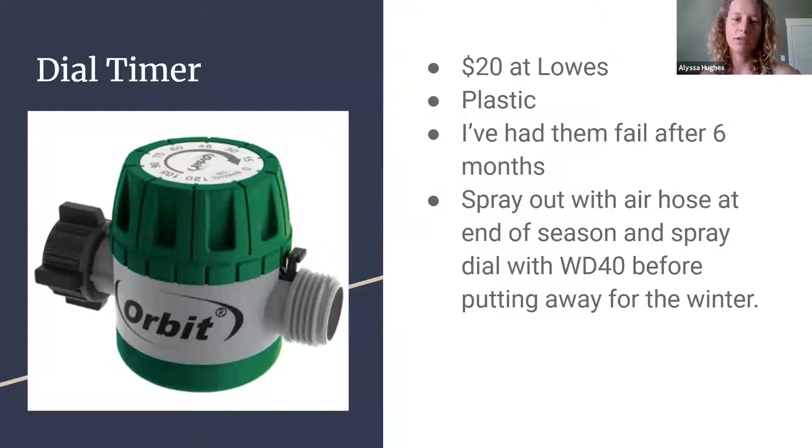So this is the dial timer I was talking about. You can see it's all plastic, so it's probably not going to hold up a super long time even if you take really good care of it. They're around $20 at Lowe's. I have had these fail within the matter of months, like 6 months in, I twist the timer on, come back an hour or two later, and it's still watering because it never shut off. This timer, as with other timers, they're great to put in place, but there's always a chance they can fail. If you do use this timer, you'll get it to last longer if at the end of the season you spray it out with an air hose and lubricate the dial with WD-40 before storing it.

Here is an electrical timer. It requires a couple AA batteries, and you can see it's just a single hose application. It's just as cheap as the dial timer, and it has really great reviews. The nice thing about this one is you can set the clock and the time, and then it'll just go off automatically, where with the dial timer, you have to remember to turn it on. You don't have to remember to shut this one off—it will automatically do it as long as the batteries continue to work.

And it's nice because it has a 12-hour repeat option, so when it's really hot and really dry, you can water at 6 a.m. and 6 p.m. I have a little video clip of that.

So this is the dial timer. It's really straightforward—you just twist it, and you can see it can go up to 120 minutes. Again, it's plastic. You connect it to the spigot on the left and to the hose on the right.

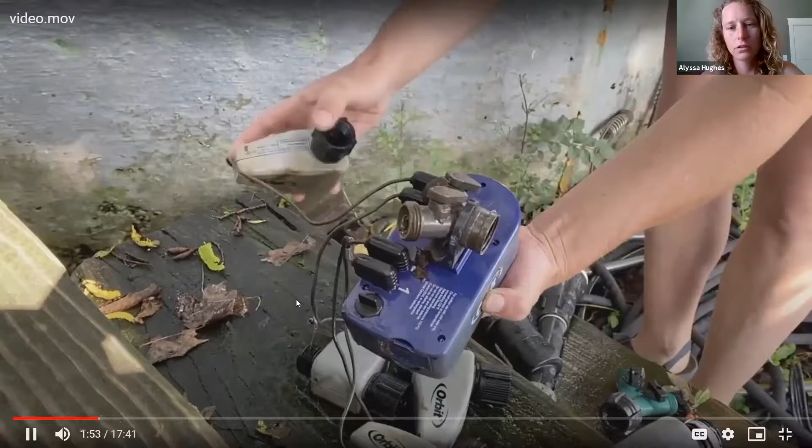And then this is a 4-unit timer. It's nice because these are not all attached, so you could even have 2 different spigots, if they were close to one another, all on the same timer. And that's the Orbit's brand.

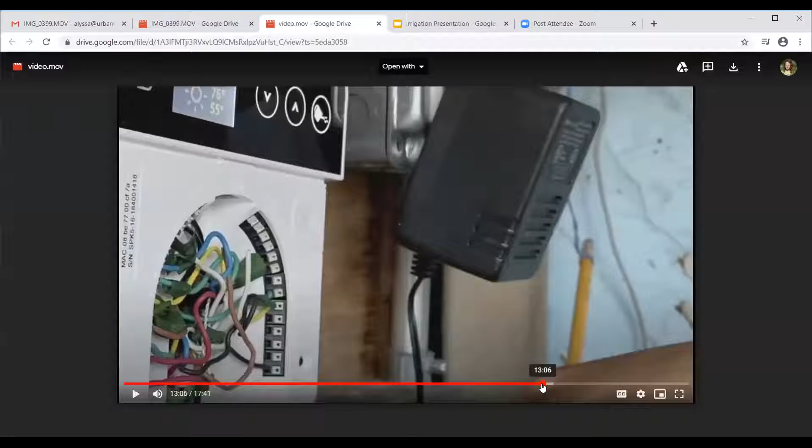Okay, so we have a question from Laura. The question is: is the rain machine PoE, or does it require a separate power source? It does require a separate power source, so that one you have to plug in to just a regular outlet.

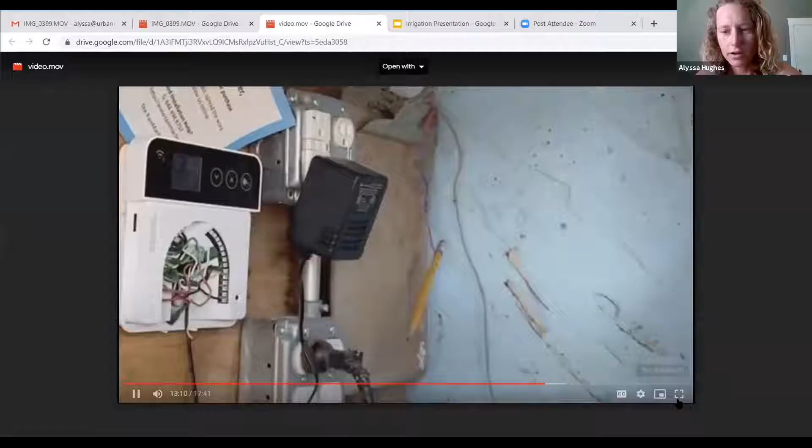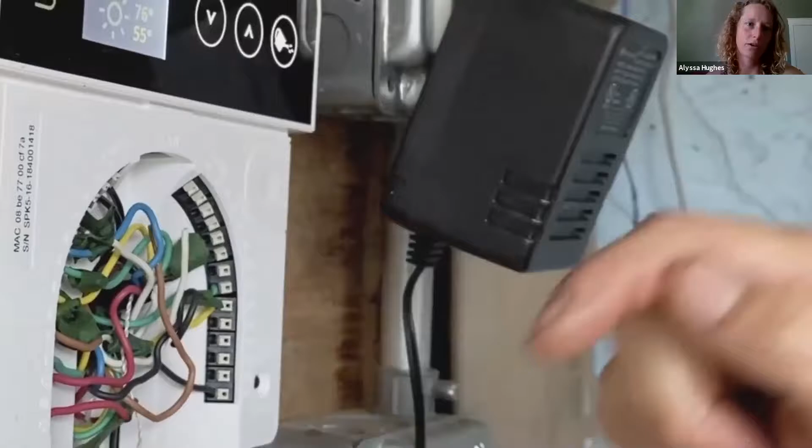So this is our rain machine, and you can see that it is actually wired in. This one's not connected to hoses. It's connected to your plumbed-in irrigation lines, wired in, with different diaphragm options that open and close once they're hooked to the system. It has a lot of different programs, so you can have different increments of plots running at different times.

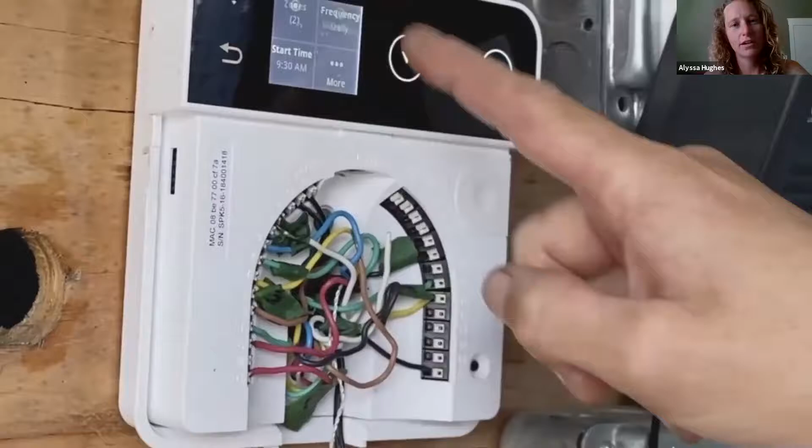It's nice because the start time you can connect to sunrise or sunset, so you can set it like 30 minutes after sunrise or 2 hours before sunset. The one thing that does annoy me about this one is that as far as frequency goes, it only allows you to water daily, not hourly.

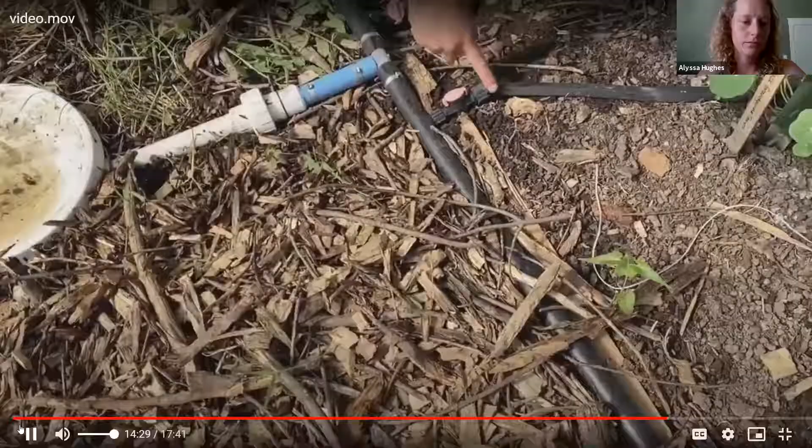So the different zones - we have 9 plots in our back field, and 3 of them are underneath plastic, 6 of them aren't. When I say underneath plastic, they have high tunnel or cat tunnel structures on them. The different programs allow us to hook up all the stations underneath a high tunnel and let those water together, while all the ones that aren't under plastic can be on a different program and run for different amounts of time.

That's really nice with this system because it is connected to the weather. The high tunnel plots, even if it rains, they're not getting watered, because the plastic isn't allowing the rain to soak into the beds. So it's nice that through that system we can go in, and for different programs, disconnect it from the weather app so that it waters even if it's raining outside.

So yeah, similar things, but things to consider before you buy a timer: are you going to need electricity? If this is on a rural plot where you're not at, you're going to want different options. I've seen people connect ones that do need electricity to little solar panel systems. So there are other options that don't need Wi-Fi or an Ethernet cable.

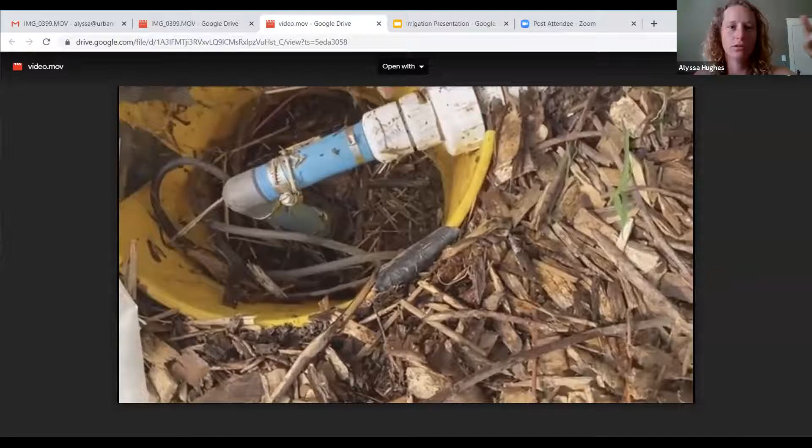It's always a good idea to check for spiders before you stick your hand down in there. It's hard to see from this image, but there's a little electrical component in there. When the electrical lever switches as the timer turns on, it twists a little dial that allows water to start seeping in, which expands the valve and allows water to flow freely. This system that we have here, I'll talk about that later.

Where did you learn how to do that? That is so cool.

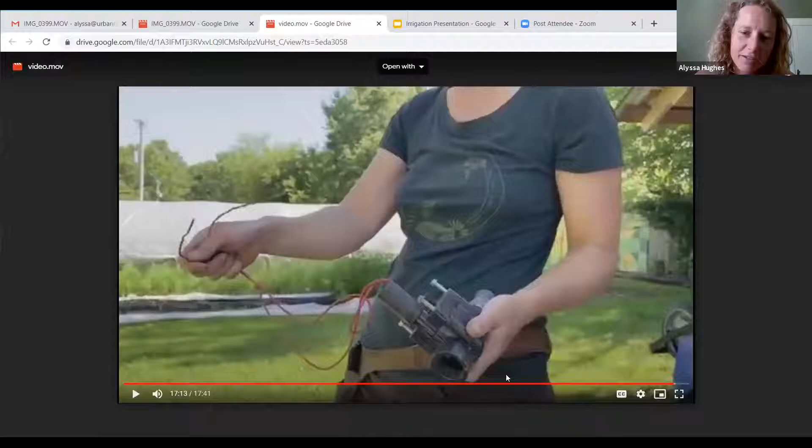Adam Millsap did most of it and has just kind of taught me how to use it. But there are some really great resources out there that you can learn from, and I'll tell you more about that a little later.

So this is what is down in the bucket that you couldn't see. The wiring actually is ran clear back from that timer underneath the ground to our individual plot buckets. And yeah, this is the little piece that expands to allow water in and then allows it to flow through.

Okay, so back to hoses. Before you install a timer on a hose bibb, it's a good idea to have a Y splitter put in directly to the spigot. That's just kind of a convenience thing. The timer's nice, but sometimes you just want to be able to quickly turn on and off a hose.

And then it's a good idea to have plumber's tape and hose washers handy. You'd be surprised how much a drippy faucet adds up over time. So if you can just prevent that in the beginning, that'll save you from having to come back, take it apart, and fix it later.

Quality quick release valves will make your life better. If you haven't used those in irrigation, you should go to Lowe's or Walmart and just even buy the cheaper brand. Especially with older people, if you have any sort of arthritis problems, attaching hoses to the spigot can be really difficult and annoying. But if you already have the quick release valve connected, then it's a really simple on-off thing.

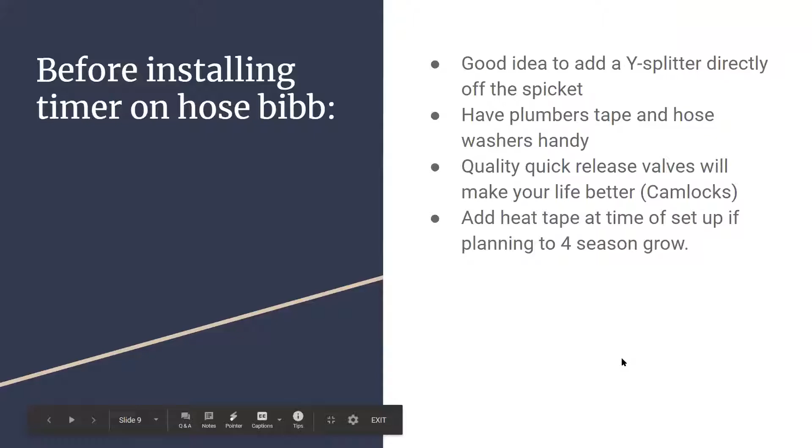That's a really good point. I have rheumatoid arthritis, and so just doing two hoses is really difficult. Yeah, it's really annoying. Once you use quick releases - I used to think this when I used air hose applications that are all on quick release - I'm like, why is this not just the norm?

It's so much easier. And another thing to consider, if you are going to be growing into what we call the fringe seasons, either early spring or late fall or through the winter, it's a good idea to go ahead and add the heat tape right away. It's just easier to put on at the beginning, and then you're not panicking the first frost night and having to take it all apart.

Okay, so these are the quick releases that I was talking about. A set of 4 from Walmart or Lowe's is around $20. I'm really hard on stuff, I guess, just because we're using things daily. But if I get an entire season out of these, I'm happy, which broken down is $5 a piece, and it definitely saves me $5 worth of time and frustration to have these on.

And before I attach these to a hose, I always use plumber's tape as well, just to prevent leaks. I've seen some of these that are nice - as soon as you disconnect, it actually stops the flow, which saves you another step and another piece of equipment.

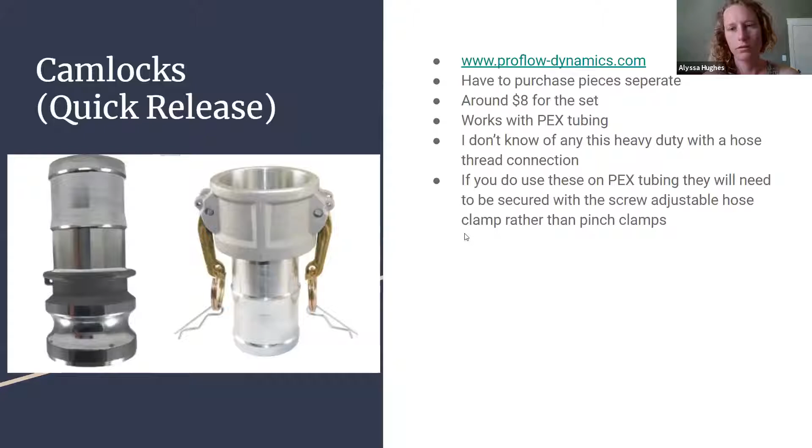So ball valves, this is what I was talking about with those quick releases that shut off automatically. If you don't have that kind, then this will also save you steps. I put these before any of our watering ones, just in case I want to switch them out. I usually use these in combination with the quick release. That little black plastic lever piece wears out before anything else does, which is annoying. I wish they would replace that with metal. Right now we have a pair of miniature vice grips on one of ours because the plastic is gone, but they last about a year.

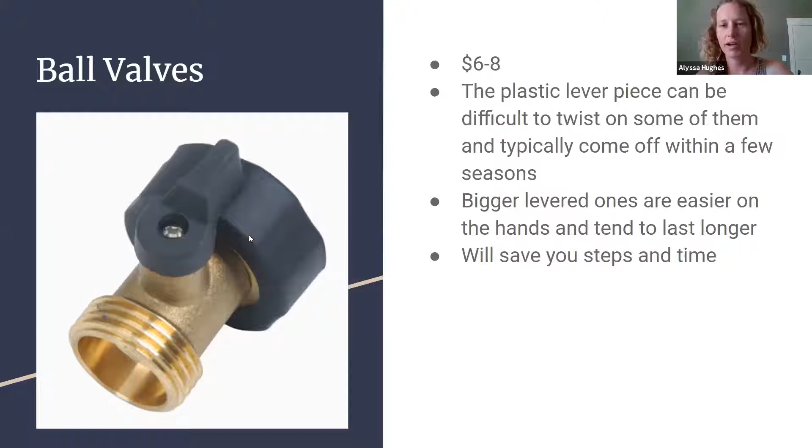Yep. So now I'm gonna take a drink of water and then I'll jump into this.

I often get questions about why we overhead water some things and why we use drip tape on other things. Overhead watering is better for the initial germination of seeds. It works well for direct seeded crops that are really dense, like a salad mix or carrots. It can help cool air around plants and soil, so things that don't germinate well in warmer weather, you can use overhead irrigation to help do a little temperature control.

If you are using overhead watering, it's more important to water in the morning due to evaporation loss. It's also one of those old wives' tales that you shouldn't water in the sunlight because the water droplets are going to act like a magnifying glass and burn your leaves, which I just learned is not true. Apparently there's a bunch of research to back that up, but you can still have fungus issues if you overhead water big leaves that then sit there moist.

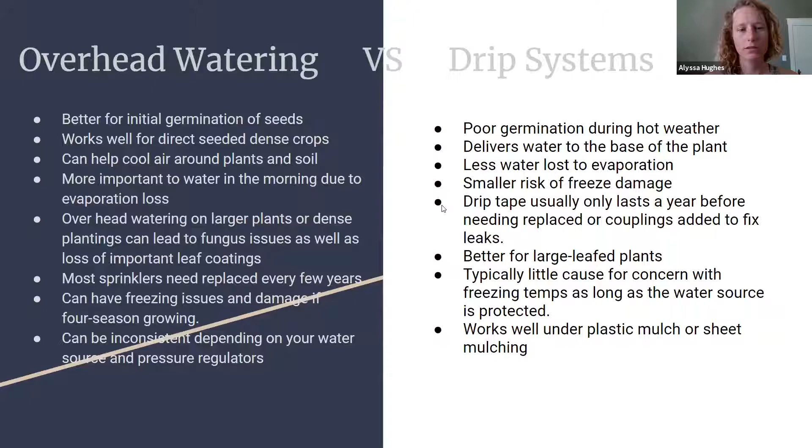So this is the overhead irrigation that we use on the farm currently. These little pieces, I could not find them online to double check my price, but I know that we bought them at Home Depot or Lowe's, and they're pretty cheap. I think it's like a packet of 10 for $3.50.

We space these out in a row down the pathway between our beds, about 4 to 5 feet apart. And the circle that it waters is enough to cover 4 of our beds. So when we are going to use these, we try to direct seed 4 beds in a row that all are going to want that overhead irrigation. Watch the video of that.

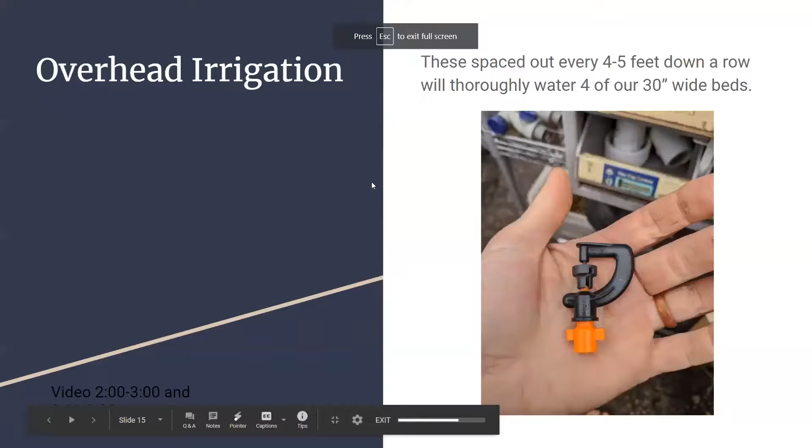So a step up from those little sprinklers, and what pretty much everyone I know is moving to, is the Senninger Wobbler. The way that it shoots the water out, it's a really thorough pattern, and it falls almost at that 90-degree angle to where it's more like a gentle rainfall, whereas sometimes sprinklers are kind of at an angle. There's a lot of different options.

You can do circles that are 33 feet to 46, and I think there's even some bigger ones. They range in price from $13 to $15 for the whole assembly. That means like the stake that it's connected to. You do still have to connect it into the PEX though. You can get these online from Irrigation King, and then a great resource if you're not familiar in the area is Morgan County Seeds. They operate out of up by California, Missouri, and they have really a lot of great options for a great price.

So the drip tape we use is the Chapin brand. Again, it's meant to be used for a single season, but we get 2 to 3 years out of it typically, or 2 to 3 seasons.

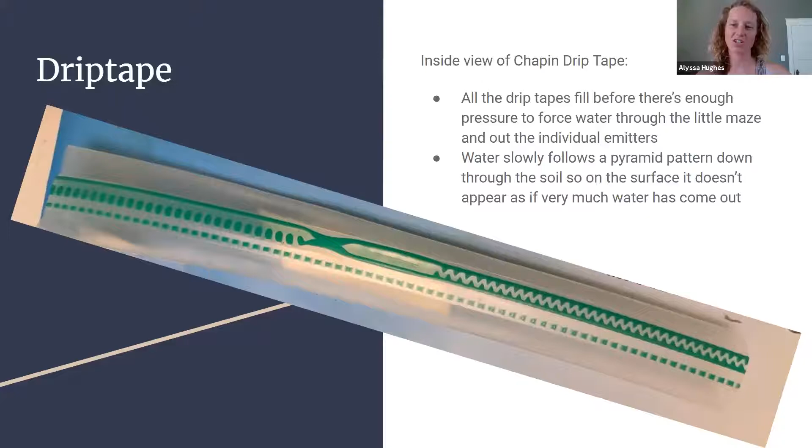Maybe you can go in on a box with several people if you don't need that many.

And then, to seal the end of the drip tape, it's as simple as cutting off the end, folding the end of your drip tape back on itself, and then using that piece you cut off to secure it in place.

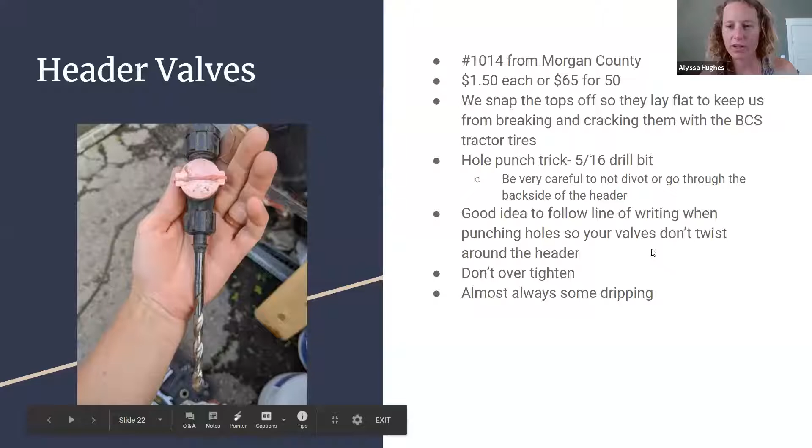When you put these in, you want to be careful not to over tighten them. It's threaded, but it's plastic, so it's easy to break the threads. I used to get really frustrated that these systems would drip, but it's just going to drip. There's not a whole lot you can do about it. Sometimes you can get it perfect for a short period of time, but...

If you are using a drip tape system, it's important to attach pressure regulators to your water source. Most drip tape wants to be run between 10 and 15 psi. Pressure regulators are pretty easy to come by - most hardware stores have them in the irrigation section, and for most that connect to your typical household hose bib, they're just $10 to $15.

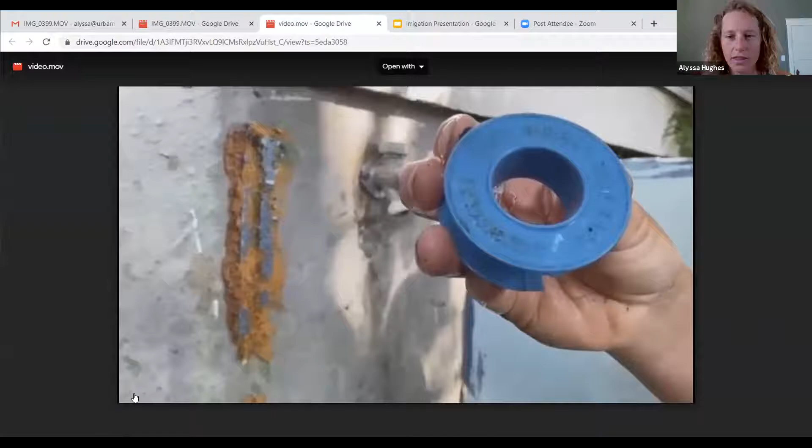Okay, so this is just kind of a demonstration of most of the stuff I've been talking about. I'm using the plumbing tape on the hose bib thread there, and that's another easy thing to come by - pretty cheap, I think like $1.25 a roll in most irrigation sections.

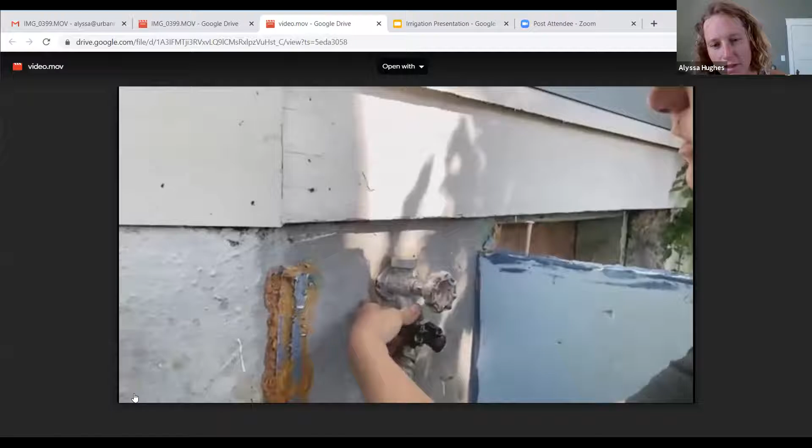Then you can see I'm connecting - it's kind of hard to see, but there's the first splitter valve connected at the base. Then that flows into the Y filter, and the Y filter flows into the pressure regulator. I'm putting the plumber's tape on this connection as well.

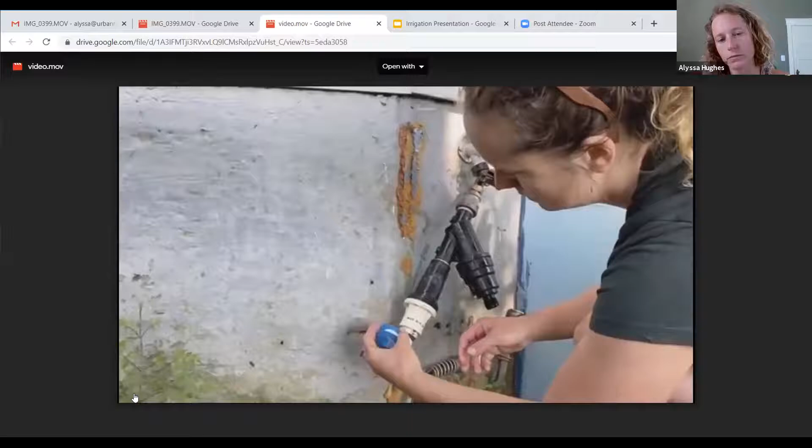I feel like nothing is more frustrating than hooking together your system and then having a bunch of leaks that you have to go back and fix. So just put in a little bit of preventative time and it helps.

So this is actually the irrigation to our front plot. What you saw earlier was to all of our back plots, which there's 9 in the back, and then up front we have 4. So I'm just using this cheaper timer that has the 4 different hose options.

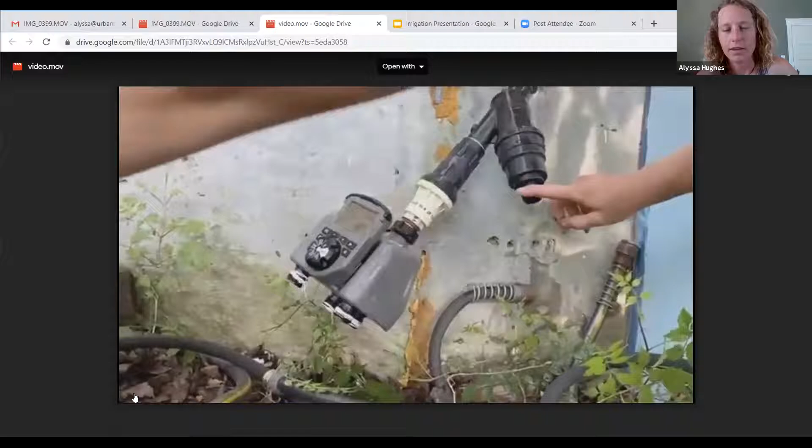Pointing at the filter, so that is the clean out, and it comes with a little metal cap that you can pull off, but that's gone missing somewhere, so we just use another on-off spigot. You're not going to want to connect a hose to that end - the filter won't work properly if water's flowing out through it.

So especially if you're on city water, that's just going to catch any residue that's coming through in your water.

Alyssa, we have a couple of questions in the Q&A. We have a question from Laura: do you have a written diagram of this layout from the water source? I don't, but if it's Laura Ernst, I can get you one.

We have another question in the chat. Laura Burdette asks the same question: do you have a written diagram of this layout? No, I don't, but if you email me and want a written diagram, I can draw one out.

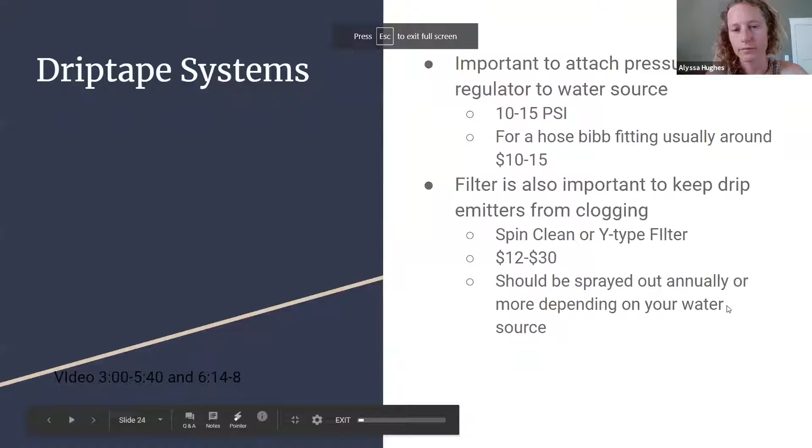So common mistakes people make with a drip system: one, overwatering, because like I talked about earlier, you're not really seeing the amount of water being put down. If you're concerned your plants aren't getting enough, you can always wait 30 minutes, dig a hole on the edge of one of your beds, and examine that cross view of how much water is in the soil. Also, if you run it too high of a pressure, each one of those emitters turns into a sprinkler, like a steady misting stream, and the water is not going to be where you want it.

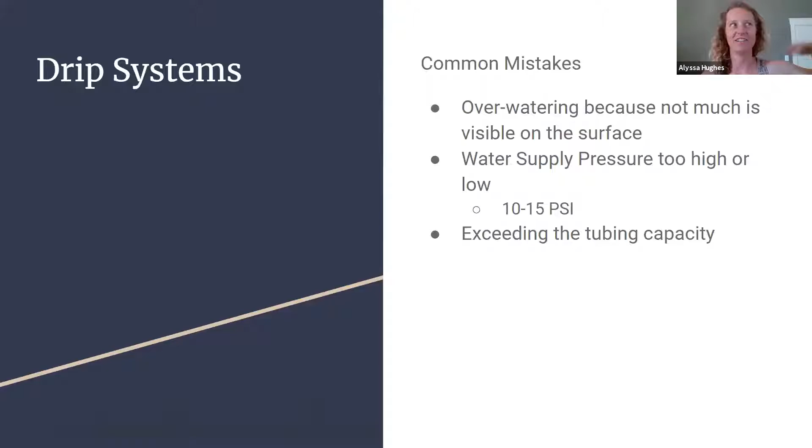And then the other thing is exceeding the tubing capacity. So depending on your flow rate and gallons per minute, if we were going to try and run the whole farm off one single continuous header, if it was in one line like that, we would probably have some flow issues. So before you commit to a system like this, you need to see if you have enough flow to do that.

So how many gallons per minute will your source emit? An easy way to figure that out is to turn on your hose or wherever your water is coming from and time how long it takes to fill a 5-gallon bucket. You can figure your gallons per minute from that.

That doesn't feel like very much water, but what if you want to have multiple plots going at the same time? One issue the farm originally ran into was not being able to wash vegetables at the same time we were watering plots. So before they redid the irrigation, now we have a big 2-inch pipe that allows us to have a really incredible flow rate. Before we did that, we were just connected to a hose bib, and the irrigation basically had to run all day—it would run to one plot, and we just had to keep switching it around because there wasn't enough flow to water multiple plots at the same time.

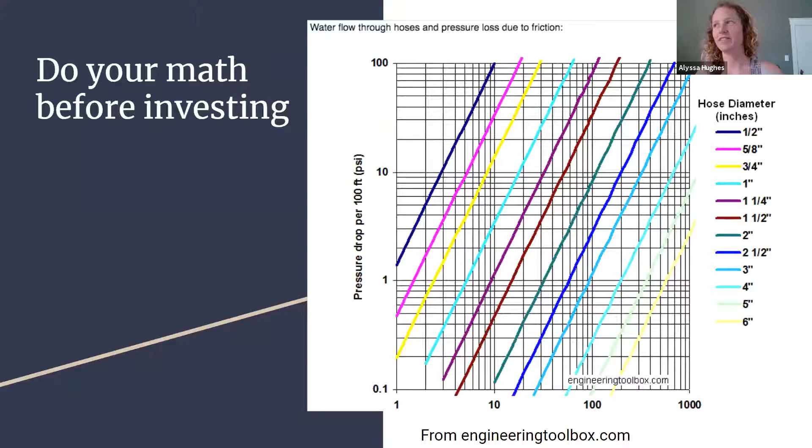I had never, before we got into farming irrigation, considered that there's friction between the water and the sides of the tube. I don't think about there being friction between a liquid and plastic, but there is.

So if you are going to commit to plumbing in your irrigation, you definitely need to do the math first and make sure your system has enough pressure and flow for your projected water usage. Consider where else down the line you want that water to go. If you plan on putting in a wash station or a pack shed or expanding and adding more plots, go ahead and plan for the long haul, even if it's not come to fruition yet.

If you are using municipal water, sometimes there's an option to get a discounted price for water not run into the sewer. So if you're in Springfield and you look at your utility bill, you're getting charged one price for your water usage and a different price for your sewer usage. They just track the one water usage rate, so we have to track the amount of water we're putting on the ground and report that once a month, and then they deduct that amount from our bill. They're not set up to automatically record how much water you're using compared to how much sewer you're using, so they assume all the water you're using is going into the sewer, but in our case that's not true.

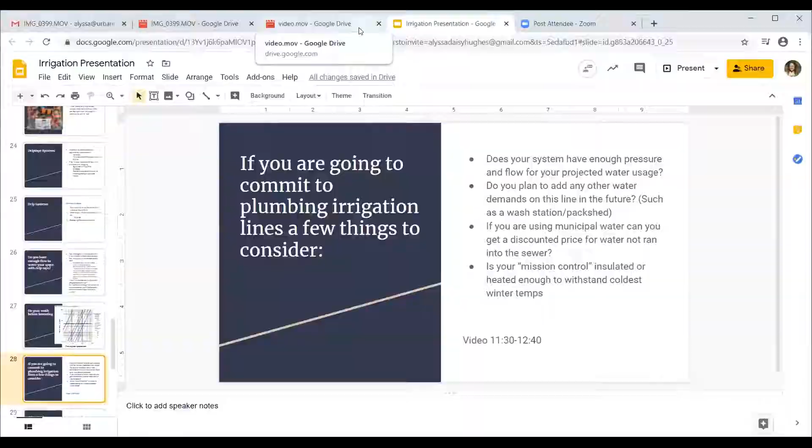So if that happens, do you guys immediately put foam on the pipes and then run hot water? How do you guys—well, no, because then it would crack even more, right?

Yeah, so thankfully there was a master shutoff valve where the water was running into the property that I was able to shut off. Then it was a lot of work—we had to irrigate everything by hose and bucket from another water source until it thawed out enough that we were able to dig out that system and completely replace the pipe. It was awful.

So there's that mission control that I was talking about with the blue insulated box. It's painted just for sun protection.

Alyssa, we have a question from Laura Burdett: Are your strategies the same for greenhouse and high tunnel irrigation?

Yeah, they're really similar. You'll see a little bit later how we use the things that we do differently for our greenhouse irrigation, but our greenhouse and our plumbed lines that go to our back plot all flow out of this mission control. Awesome. That's it on the chat.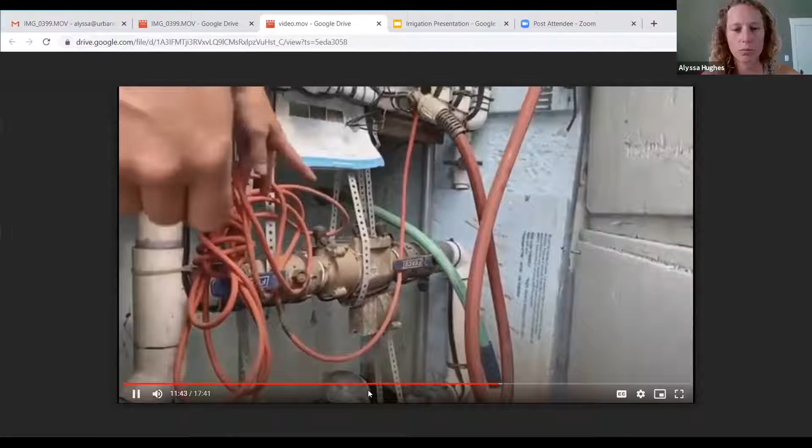So you can see down here, this is the meter that tracks how much water we're putting onto the ground, and that's the data that I report.

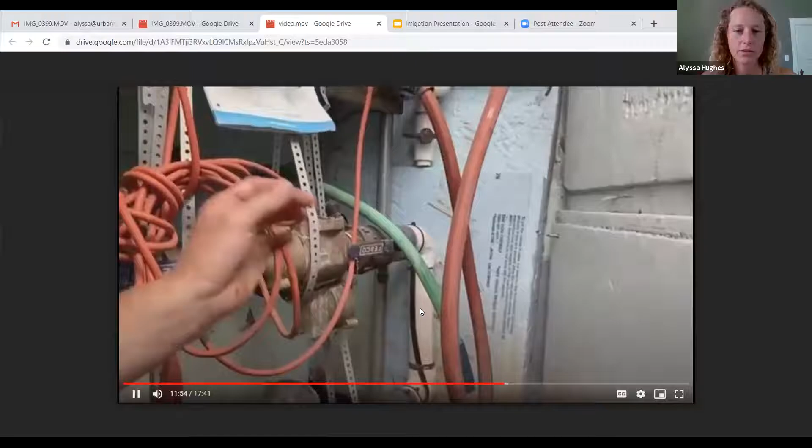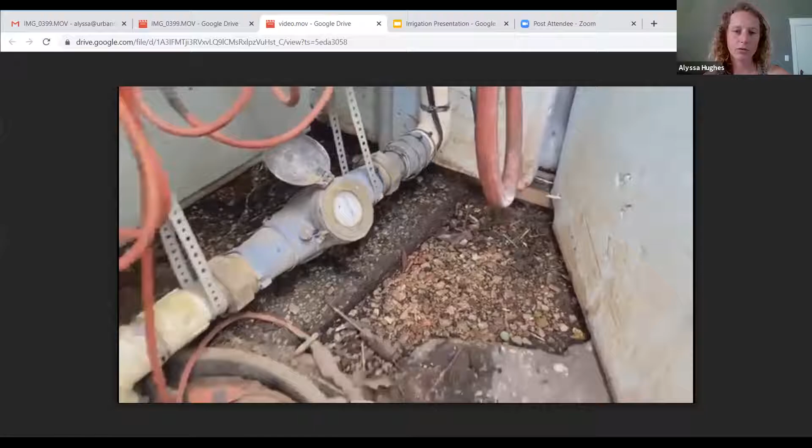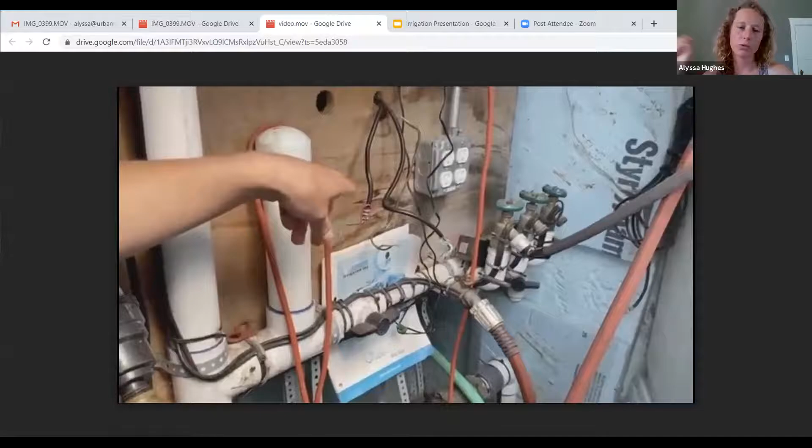We also have a giant backflow valve, and you can see this pipe is pretty wide. It's because we have so much water going to the fields, and then we also have the pack shed water farther up this line, which all eventually goes into our rain garden, so that's not sewer either. But in the pack shed, we're opening up a 1-inch diameter tube to fill our sinks really fast, so we need a lot of water flow and a lot of water pressure.

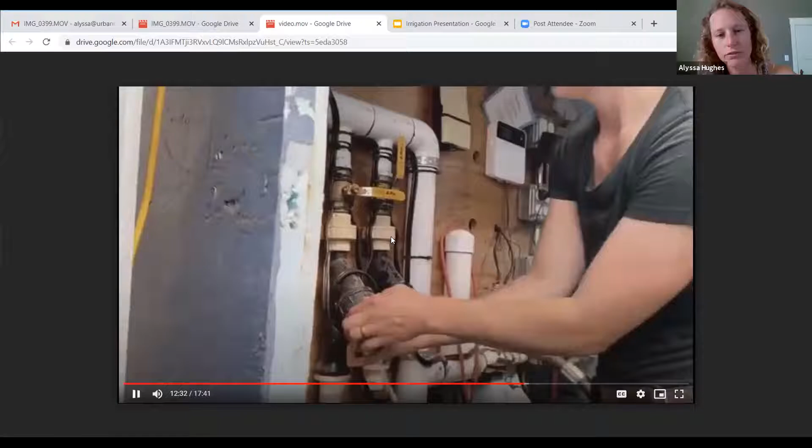So these are set up too with that Y filter there. We have big ball on and off valves. Each one of these systems, so we have 9 plots in the back, and our plot is like a big tic-tac-toe grid is how I describe it, and each one of those pipes goes out in a straight line and services 3 plots. So that allows us to have more control. If there's an issue somewhere down the line, we don't have to turn off the entire system to fix it.

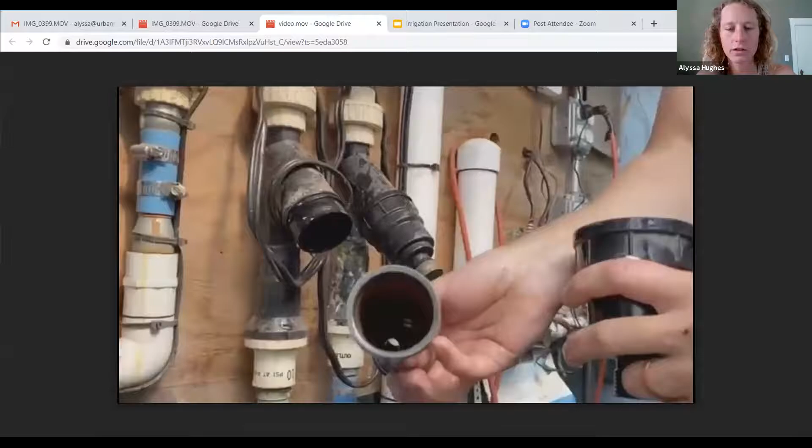And you can kind of see there's that black heat tape wrapped around, just another Y filter that has to get cleaned out occasionally.

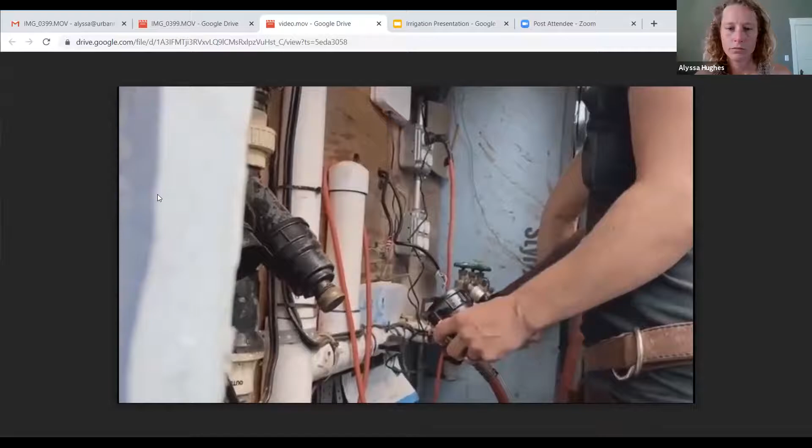And you can see we have the option to attach different hoses there as well.

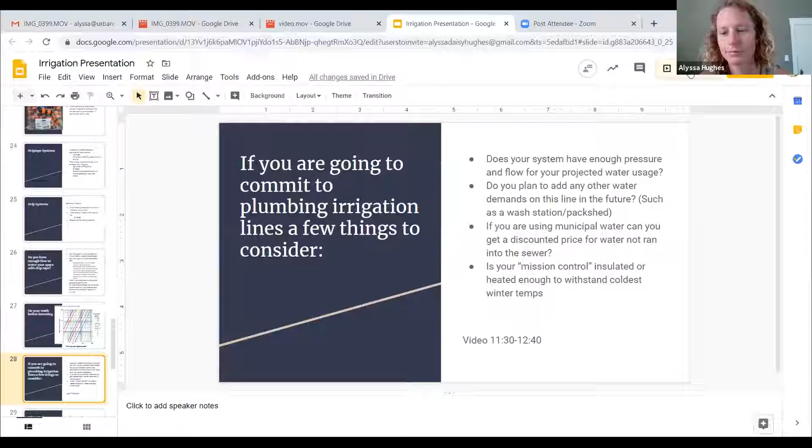Okay, and if this is all really overwhelming to you and you're just doing a backyard garden, there are these kits you can get at Lowe's that come with everything, and they're really great. I've used these in different bee gardens I've installed over the years, and for different raised bed and container gardens I've helped install. For the price, and just not having to think about all the little individual pieces, this is a really great option. I feel like it's worth the money.

So, fertigation. I'm going to talk about fertigation, and then we'll go into the greenhouse system. My presentation ends after the greenhouse system, so if there's any questions you have, just feel free to hop in.

So fertigation is the process of injecting an irrigation system with a water-soluble fertilizer. It's a mostly passive process, which allows you to start the system, move on to something else, and then come back and finish out the process. If you're just walking up and down rows with a backpack sprayer trying to fertilize your plants, or doing it with a watering can, there's a lot of human error involved, depending on the mix and whether it's agitated correctly. Sometimes we're a little heavy-handed at the beginning and then there's not enough at the end.

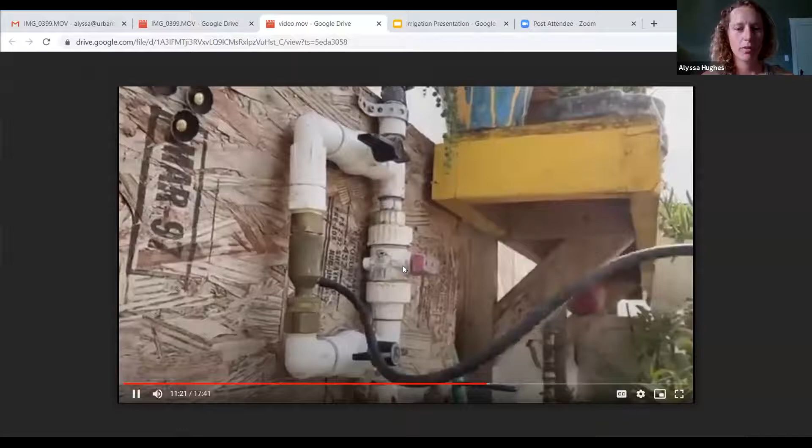Well, you take a bucket, you dilute your fish emulsion, stick this little black hose into the bucket so it can pick up the fertilizer, and then you block the water off there on the right and allow it to redirect through there, and that'll pick up the fish emulsion and put it into our hose.

And this little video is really great. It's by Adam, the owner. He was teaching his new crew how to do fertigation, and he's a really great teacher and it's really comprehensive. So I'm going to play it, but it is a little bit longer. If you have any questions, pop in.

So, fish emulsion. He says something here that is wrong right off the bat about using fish emulsion rather than hydrolyzed fish, but he has that backwards.

What we're using, and the rate I found from a couple different sources, so I feel good about it, is 4 gallons per 100 gallons per acre. So they're using a 100-gallon sprayer, putting in 4 gallons, and spraying it over an acre.

What really matters in that number is the ratio - the 4 gallons to 100. Exactly. We want to know how much fish emulsion per amount of ground, so it's the fish emulsion to the square footage or acreage number that we're after. That's 4 gallons per acre.

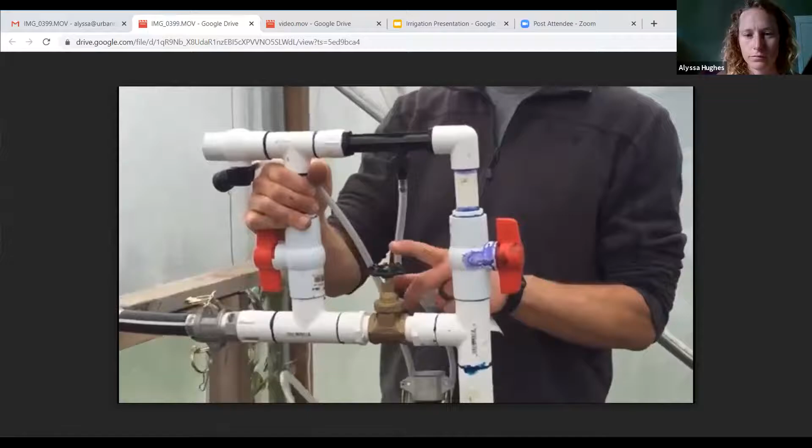So the way the Mazzei injectors work, which is what this is—our injector is up here, made by Mazzei, a Mazzei 584 3/4 inch injector—is based on pressure drop. As our water comes in on one side, we adjust this valve to reduce the pressure on the other side of our injector. It causes vacuum in this hose, pulling liquid up into there.

There's not a whole lot of risk in over-diluting this, not with 10 gallons of liquid. There is a much higher risk in under-diluting it and not getting it out everywhere. So I'd rather have an overly diluted solution that takes a bit longer to reach everywhere than the other way around.

In the real world, really the way to figure this out is to put a 5-gallon bucket of water over here and see how long it takes to run out, because you can calculate your gallons per minute of flow, which tells you whether or not you're getting it everywhere, and it would also tell you your rate. So we get our gallons per minute, and then calculate how long it took to run through our 5 gallons. You guys want to take a stab at how you'd calculate your gallons per minute out here?

This is the not fun part of it. I know, I'm like, isn't it? I'm thinking, what's the wrong answer, what's the right answer?

All of our drip tapes come in different configurations. The configuration we use throughout the farm has an emitter every 4 inches, and it drops water at a rate of 1 gallon per 100 feet per minute. So for every 100 feet of tape, about 1 minute puts 1 gallon of water under that tape.

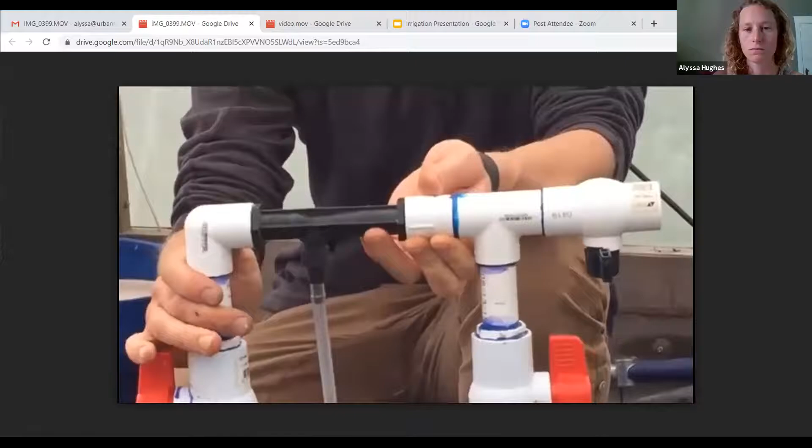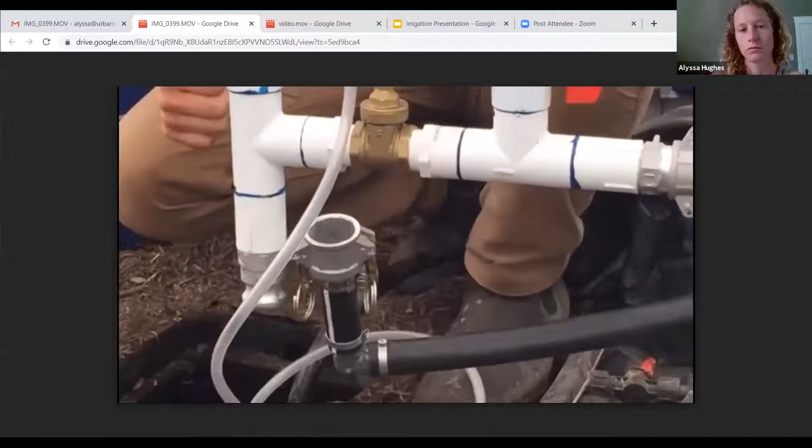You'll put zero nutrient on the ground if you have this backwards, with the inlet and outlet reversed. Given that the flow is this direction, this end hooks to our inlet, our source water. The reason this looks so gangly is so we can twist these around and feed whatever configuration we need, since our boxes didn't all line up exactly the same way.

The enemies of this irrigation system are junk in the lines and particulate in the water. So as we unhook this, we're going to be really careful that we're not getting stuff in our system. I'm going to grab this and drag it in here.

Anybody have a radio? Will you holler at Alex? I think we'll just run it like this and see how long it takes.

Because he makes a good point that we're going to dilute it quite a bit. So you don't need the water? No, it's probably just finishing it up, right? Yeah.

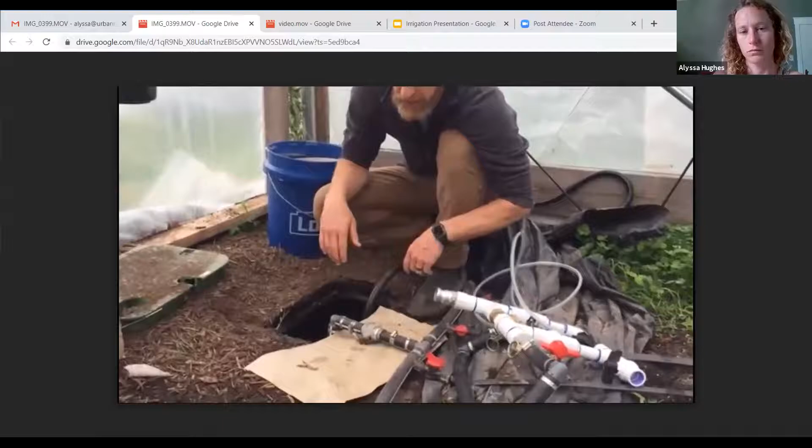So we've got our cam lock connectors here. They work just like this - you just pop these out and it'll pop right apart, okay? And make sure we don't get any junk in there.

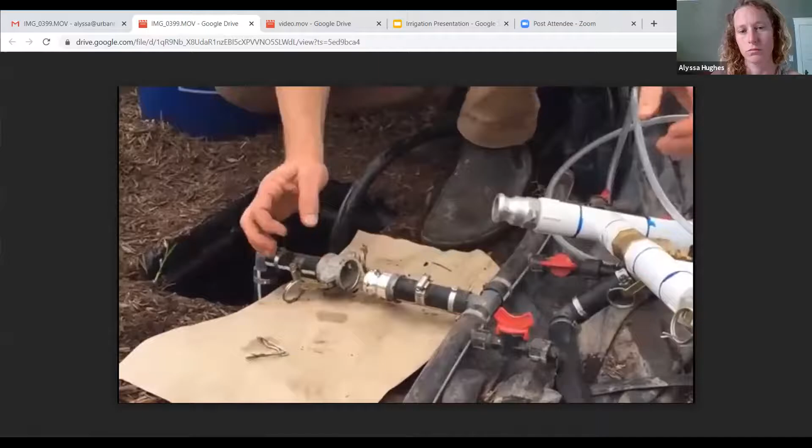Everything out here, I think, Lizzie - is everything out here set up to flow this way? As we do it, we're putting it all in that direction. So as you fertigate out here, and as we install these, and as we hook the fertigator up to ones already installed, you may find the female and male ends are reversed. That's why it's important to pay attention to flow, because you may have to reverse these in this system. Don't reverse them on this system, reverse them on this system.

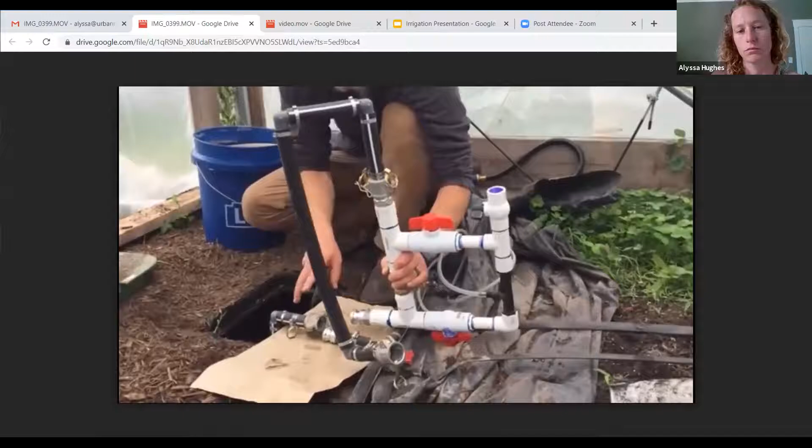So we're going to hook up to our source over here, and our outlet over here, like that. And then what's happening here is we've got our water coming in on this end.

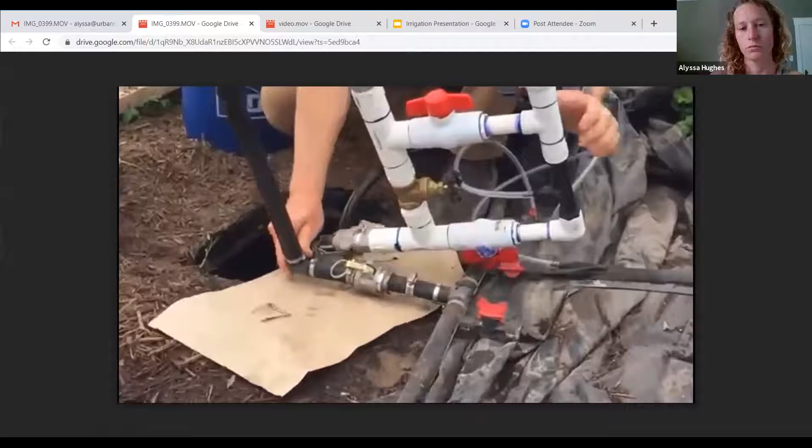When we start, we're going to have this all closed off like that. Our water is going to come in, run up to this valve, and go nowhere. We're going to start with this valve all the way open, so it'll run through the system, bypassing the injector, and running into our irrigation system.

Actually, thinking about it, something we can do to avoid that distribution issue is to go ahead and fill the system before we start. Does that make sense? Yeah. So we'll go ahead and do that now.

So I've got this valve open. I've got my source water hooked up to my inlet side, and my outlet hooked up to the irrigation side. I'm just going to turn my valve a quarter turn the way we do, and then watch all my drip tubes fill up.

So they are full. Alex, we were just realizing we can avoid our distribution issue if we fill the system before we put fish emulsion in it. So...

We still use this bucket somehow. Alex can go get a whole bucket of water for us. All right, so while we wait for that to fill up...

Let's talk about drip irrigation and why we use that. You guys know we use two different types of irrigation on the farm - I actually use three different types of irrigation on the farm. But we use the drip system, which we use for a couple of reasons.

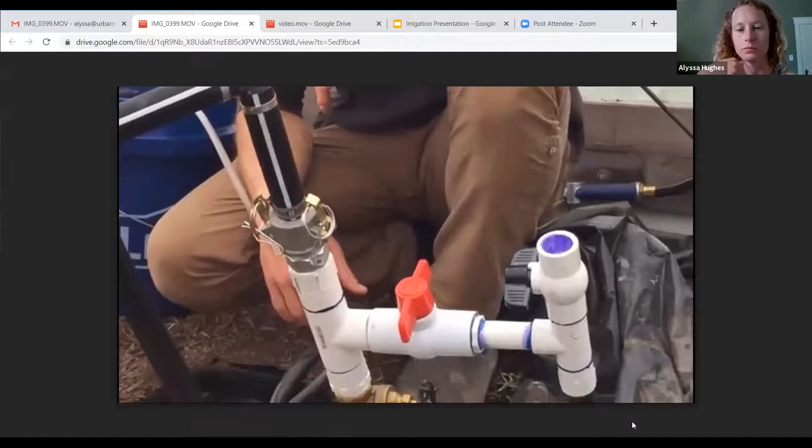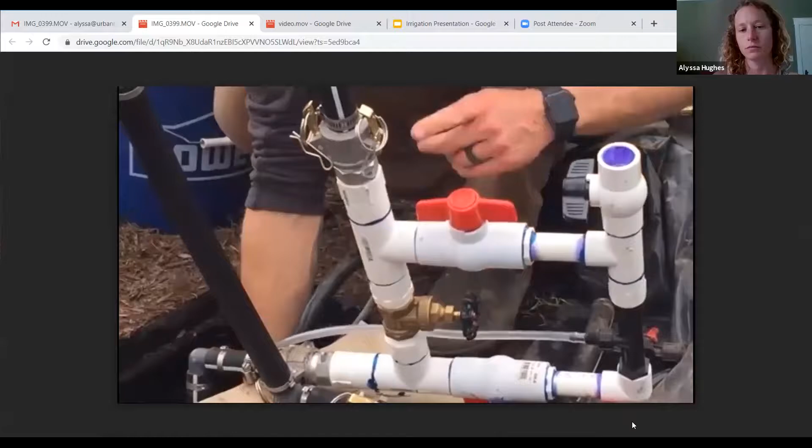And this is our suction hose. We're just going to drop that into our fish emulsion solution over here. We're going to open these guys up, so it has a path through the injector now, and we're going to leave that all the way open for the moment. So the brass valve, the gate valve, is still open all the way, so we can totally bypass the system. What you're probably going to see is that we're not going to suck anything up this hose. I hope that's what you see. So nothing coming through the hose yet.

So we're still just pushing water straight through with no suction happening over here. And then we're going to just start turning this down until we see this start to pick up. So what we're doing effectively is we are reducing the pressure on the downstream side of our injector. And as we reduce that pressure, we're going to see suction begin to happen in this hose, in our pickup hose. I want to adjust it down just until I see it begin to pick up.

And that again has to do with our distribution pattern. I want to put this down as slowly as this injector will allow me to, so that I have as high a rate of dilution as I move it into there. That way I don't leave anything out, don't leave any of the plants out. So we just turned off 2 drip tapes, row 9 and row 5.

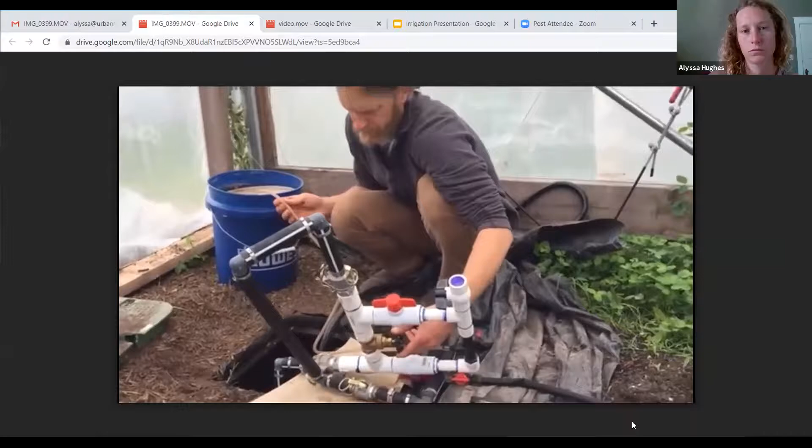Okay, so here we go. It's just starting to take up now. And that's what we're after right there. It's just a solid stream flowing through our pickup hose. And you can see it's starting to suck it down pretty fast over here.

And that'll be something you want to just walk back by and check in on occasionally as you're doing this, making sure that nothing's clogged and that it's still feeding. As with anything out here on the farm, if your result is not what you expected, then check in with somebody who might be able to help.

All right, so that was a really thorough explanation of how the fertigation system works, but it is one of the more complicated parts of our irrigation.

And then, let's see.

With our greenhouse irrigation, one of the tricks we use is an overhead hose, cable, and pulley system. Depending on the time of year, the greenhouse is sometimes really full, with tables taking up almost every square foot, covered in plants. So we don't want to drag a hose through that maze of tables, legs, and milk crates that we grow in. We have irrigation run down either wall where we have plants most of the year. It's a half-inch PVC system that's all connected, just hanging, supported by conduit and simple wire.

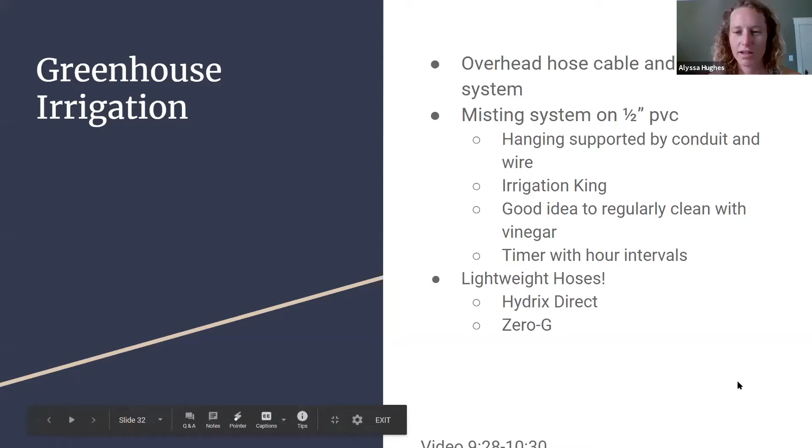Another trick I like to use around the farm is lightweight hoses. If you've never used those, they will totally make your life better. I've used the Zero-G—they're more expensive. The Hydrix Direct has really great reviews and is a decent price as well. If you haven't used those, they're super lightweight, and they fill up and expand. They're more of a fabric material than rubber. But don't buy the cheap ones, because I've seen those blow after just a few months.

Nope. I'll show you the video of that. Maybe.